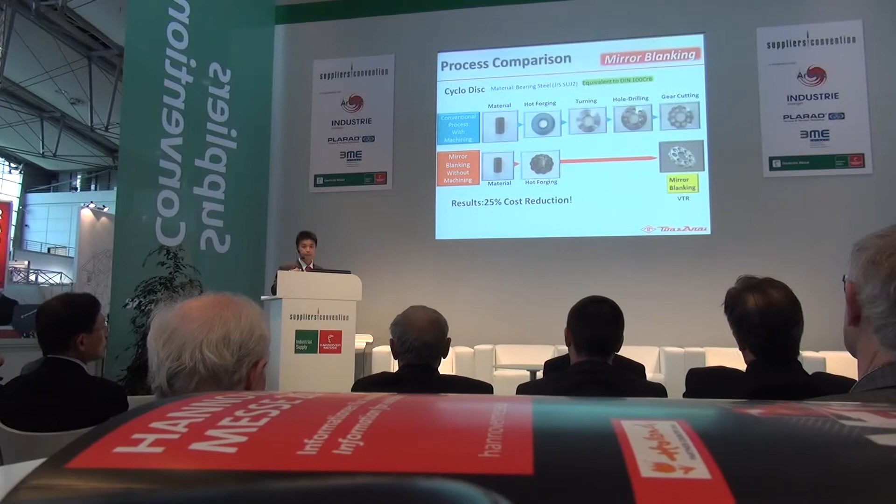I'd like to show you a very short video of the mirror blanking process: hot forging and mirror blanking. Please look at it.

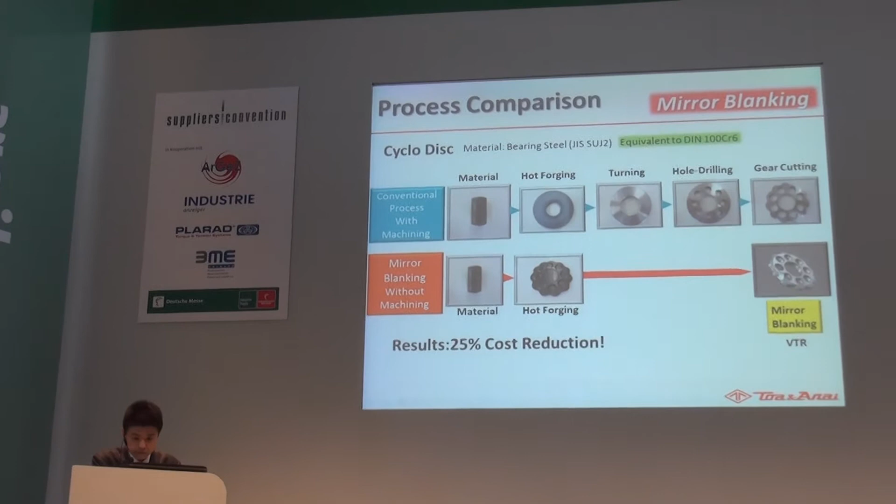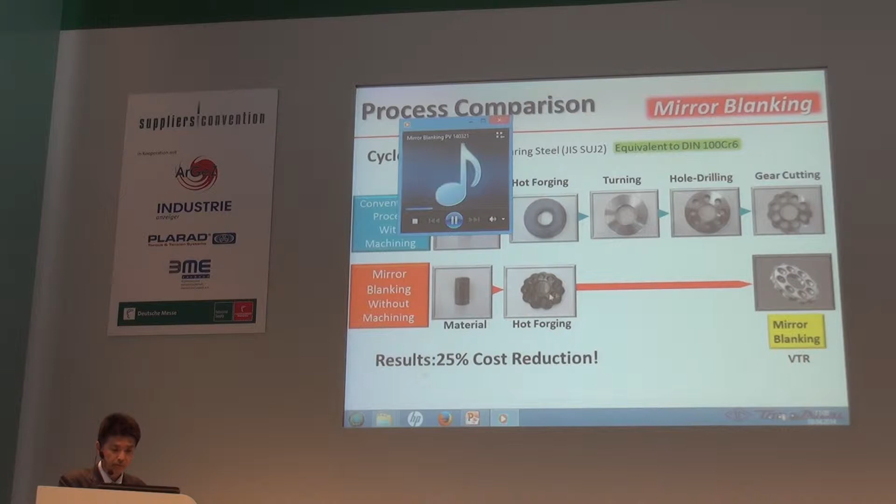Maybe this. I'm sorry, I cannot show you. So maybe you have a chance to visit our booth, I can show you this video there. Yeah, I'll direct you. This one. Yeah. Okay, good, thank you.

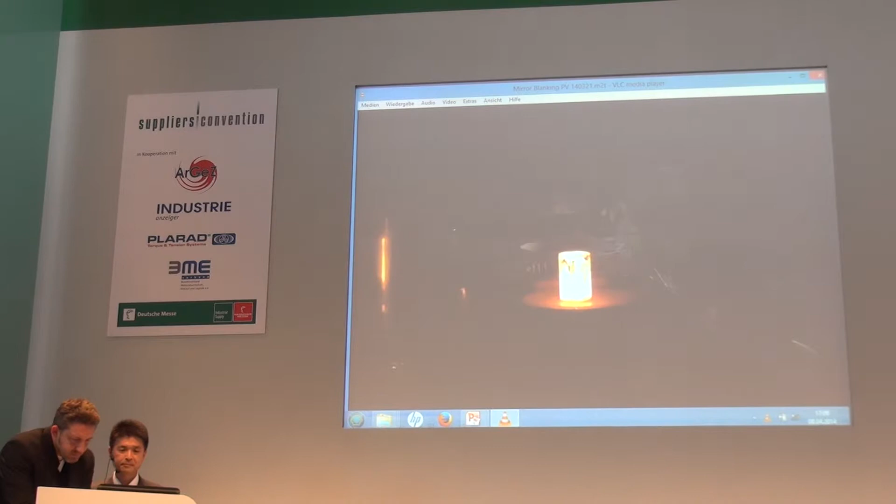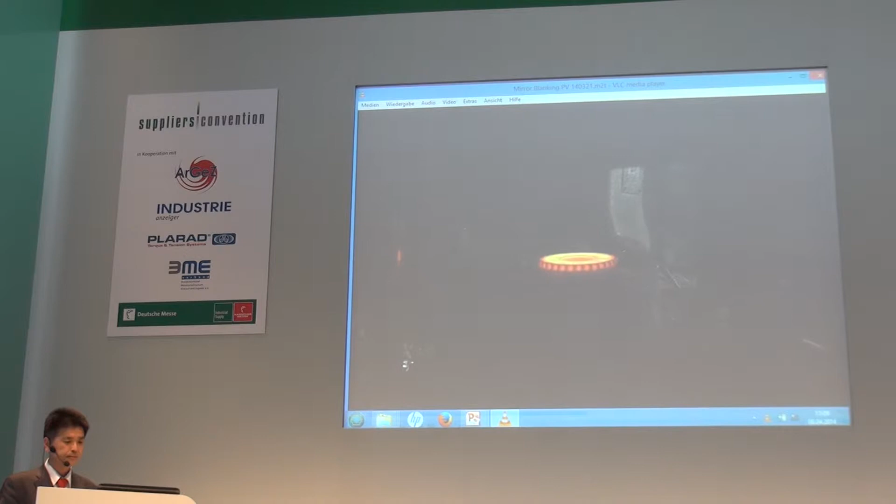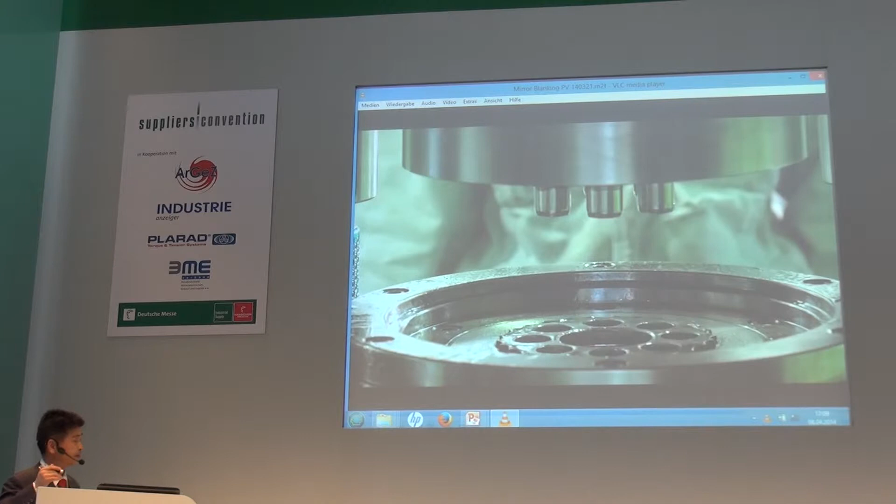Yes, this is the hot forging process. This is the mirror blanking process. Very simple process without any machining process.

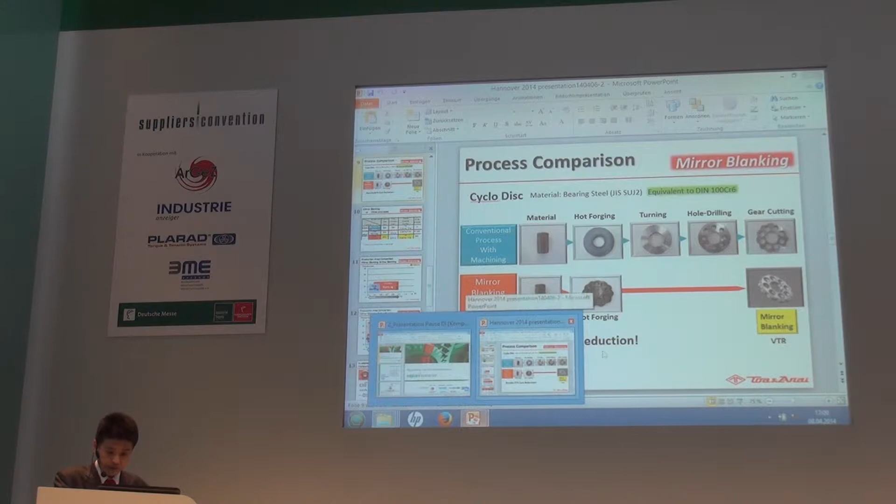Go back to my presentation. Okay. All right. Okay, so next, I'd like to show you.

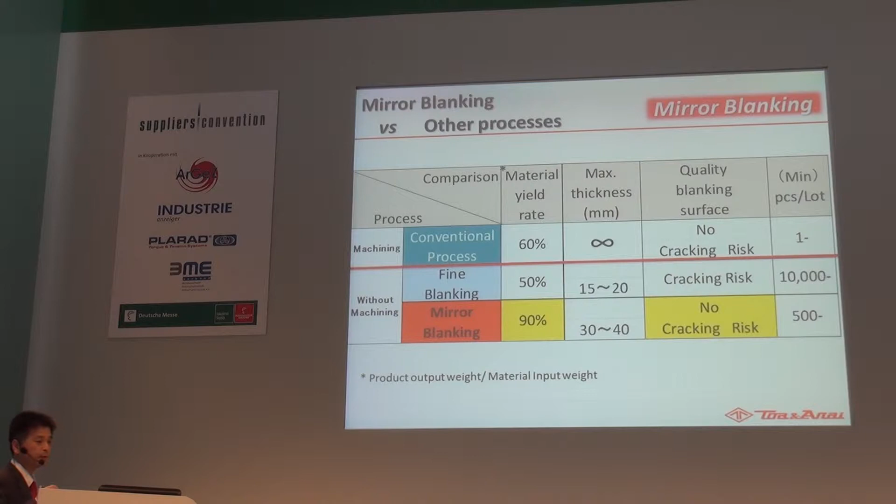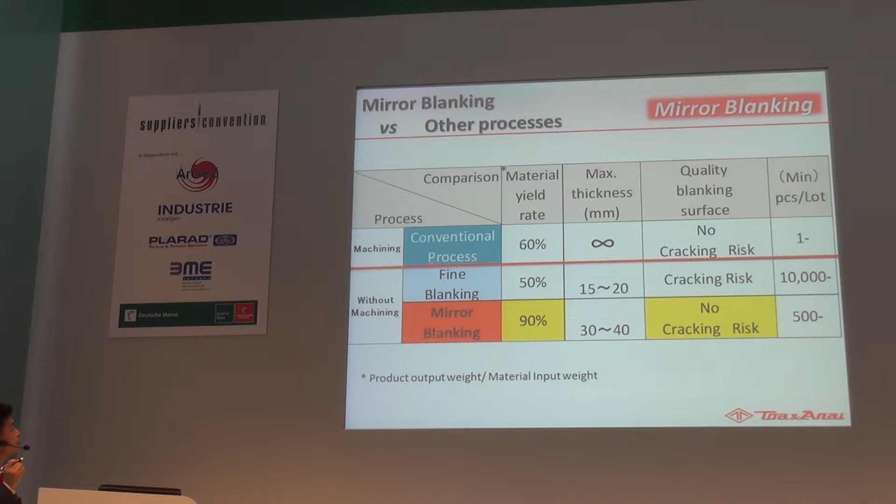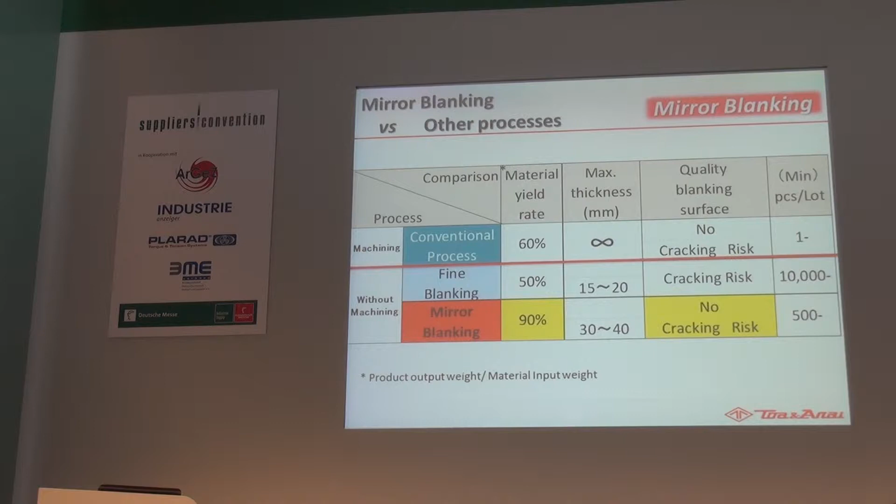I'd like to compare - this is a comparison chart of mirror blanking and fine blanking, and also conventional machining process. Please look at the material yield rate. Here I'd like to compare mirror blanking with conventional machining. You can see we improved the material yield rate from 60 to 90.

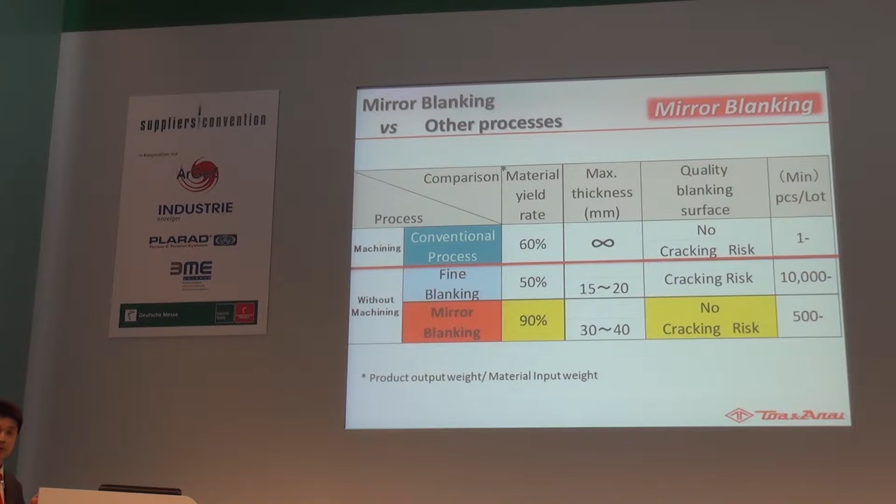As a result, 30% of material consumption has been reduced. And also, please look at the quality blanking surface.

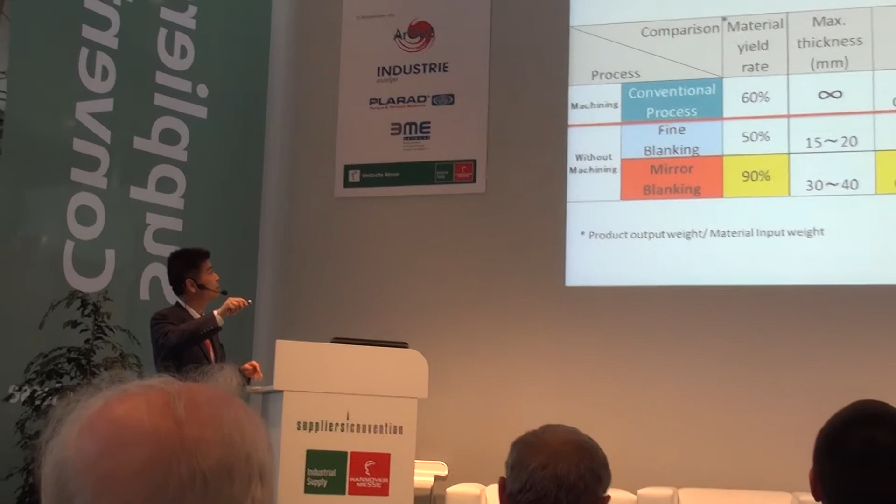This is the most important point of the mirror blanking process. When we make a hole by blanking, we sometimes have cracking risk of material. But with our mirror blanking, we have no cracking risk. It is a very important feature of the mirror blanking process.

When we make a hole into high carbon steel, we don't usually make it with blanking because we avoid cracking risk of material. However, by our mirror blanking process, we have already succeeded with more than 1% carbon steel.

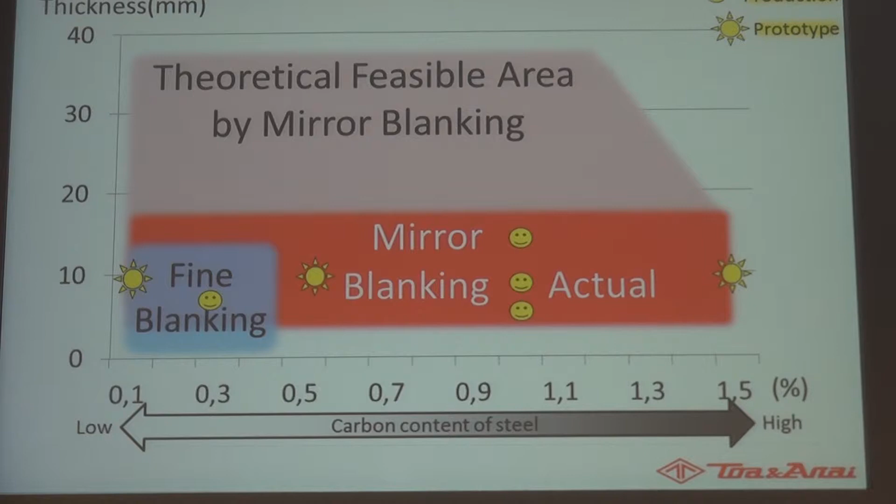Here you can see golden smile icons. These are products already in the market. This is the theoretical feasible area by mirror blanking. You can also see golden sunshine icons, showing the prototypes we have succeeded with. So we can process up to 1.5% carbon steel.

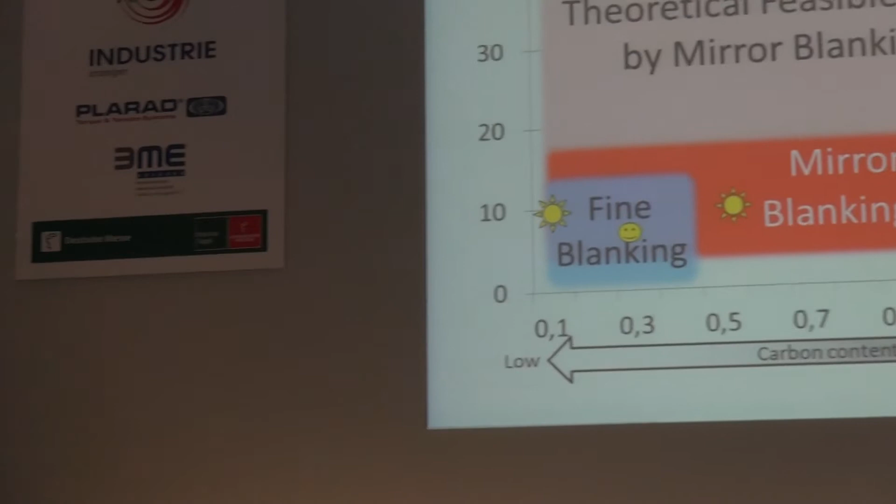As for thickness, we assume we can process up to 40 millimeter thickness. But we don't have any challenge yet. Maybe next year I'll be able to show you again.

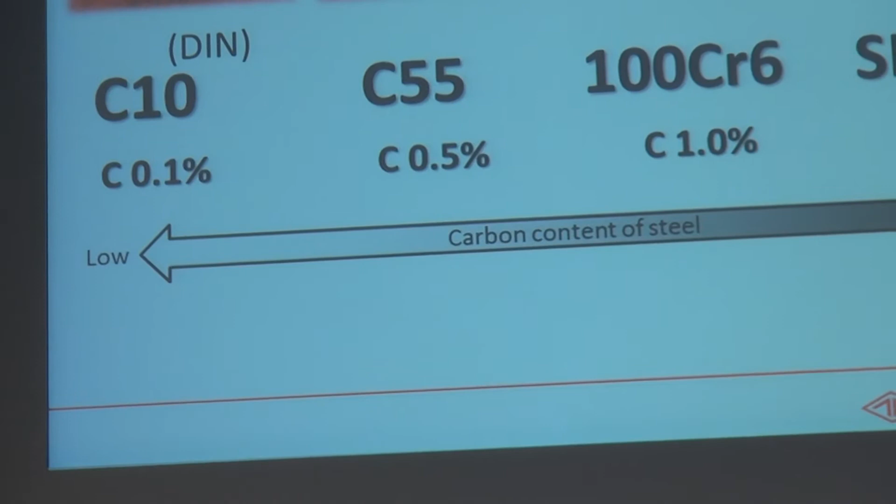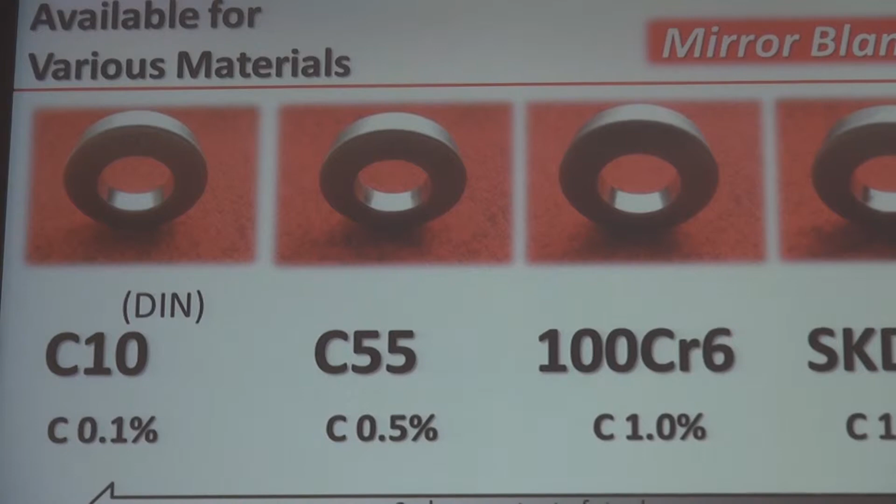Mirror blanking is also available for various materials. These are test pieces of mirror blanking. So we can process from 0.1% carbon steel up to 1.5% carbon steel.

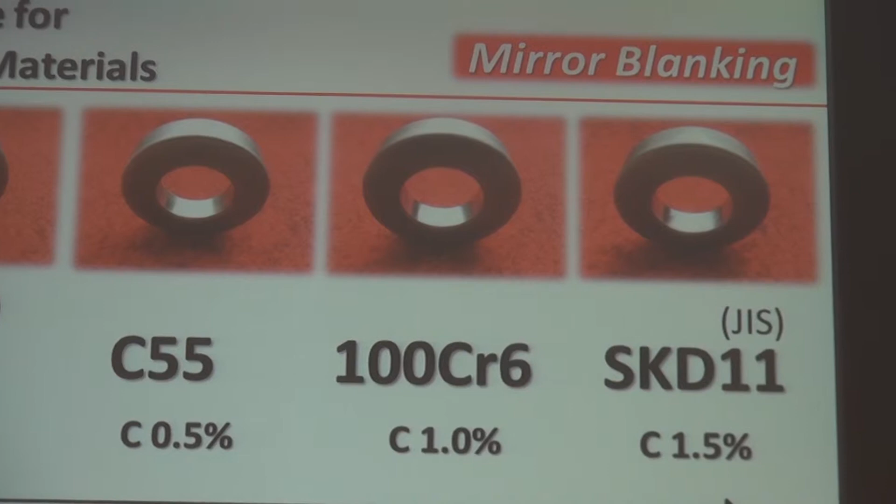This is a material name of a Japanese industrial standard, SKD11. SKD11 is usually used for tools like cold forging die. It's a very hard material, but we make it successfully.

Now I'll try to summarize the features and benefits again. First, high yield rate of material. Second, it is available for thick plates—a plate of 16.3 millimeter thickness was successfully forged. Third, no cracking risk with high carbon steel, for example bearing steel as material.

Fourth, the surface is very smooth, like a mirror. Surface roughness is about RZ 1.2, RA 0.3, like that. And fifth, cost reduction—we achieved more than 55% cost reduction for one actual customer.

Today I especially focused on explaining mirror blanking. This year I'd like to introduce our technical concepts. We have three technical concepts. First, machineless precision forging, which means products without machining.

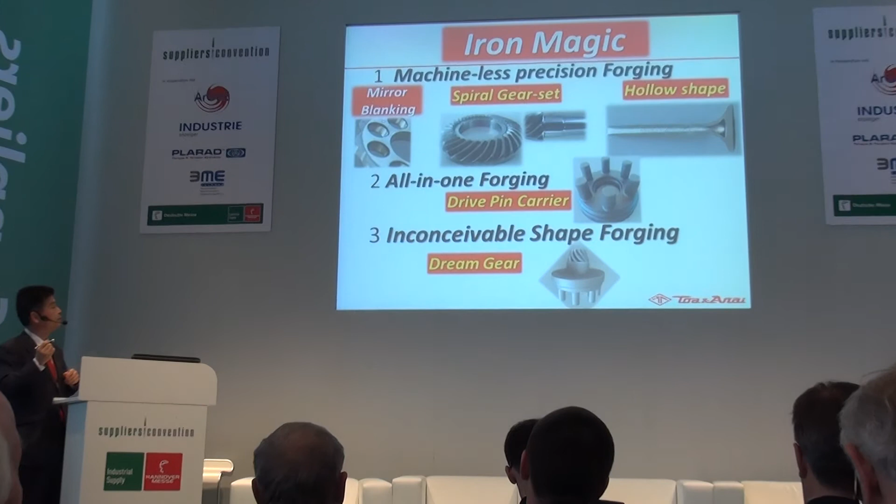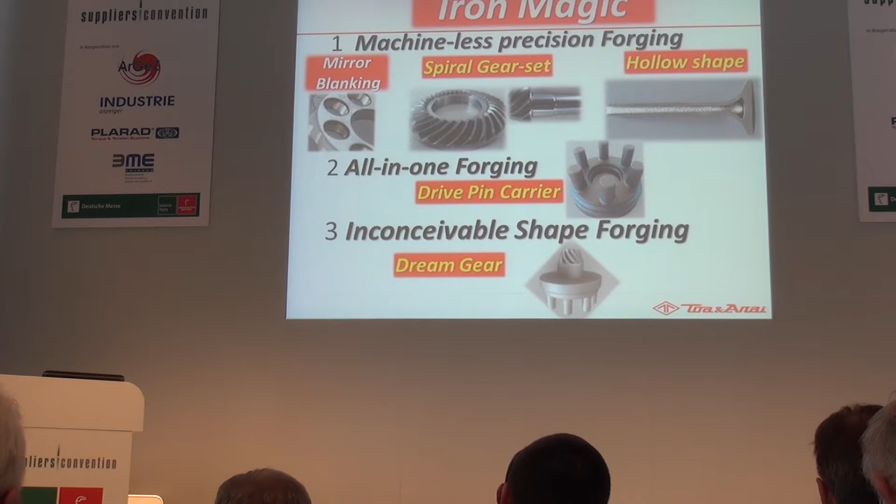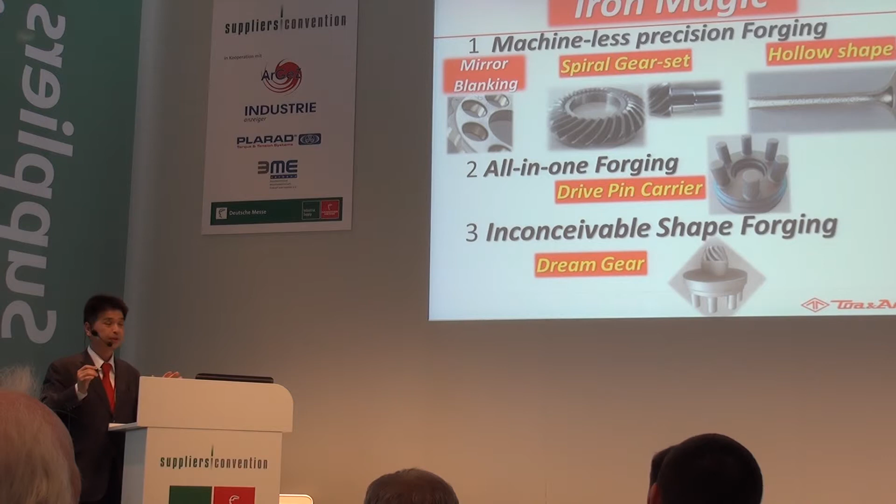Including mirror blanking, we developed a spiral bevel gear set and also hollow-shaped products. Look at this shape—this is a cut model of the hollow engine valve for automotive. Inside the stem and inside the flange, there is a hollow shape like this. This material is Inconel, so it is very hard to make a hole by drilling. So we try to make it without machining, only by forging, hot forging and cold forging.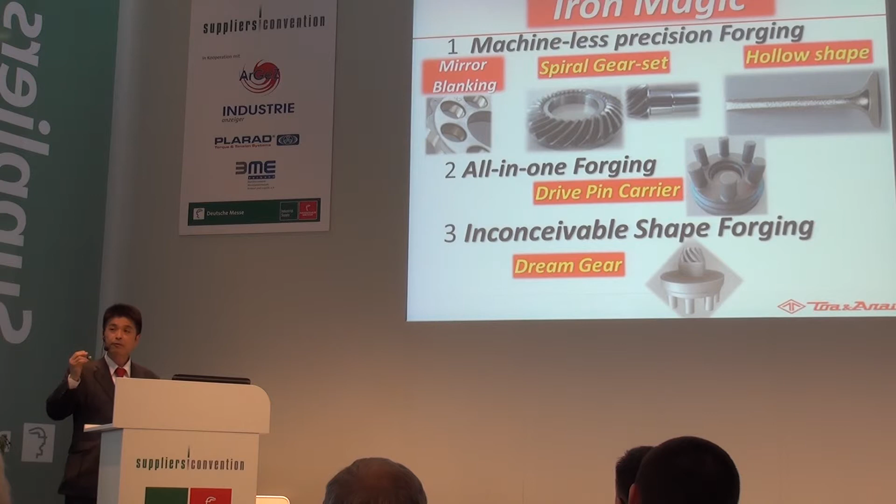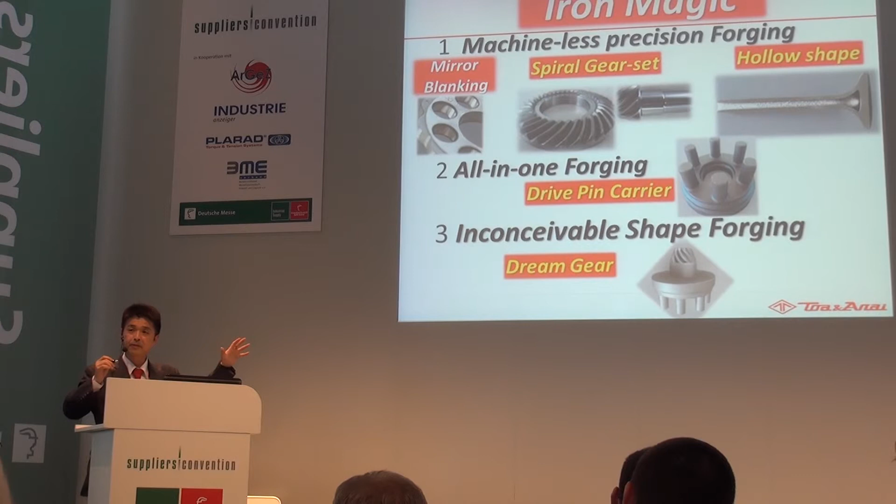So this means product without machining. The second concept is all-in-one forging, which means product without assembly. This is a drive pin carrier—we call it drive pin carrier. We make this shape only by hot forging. Before that, this product was made by assembling a flange and several pins and putting it together, a very confusing process.

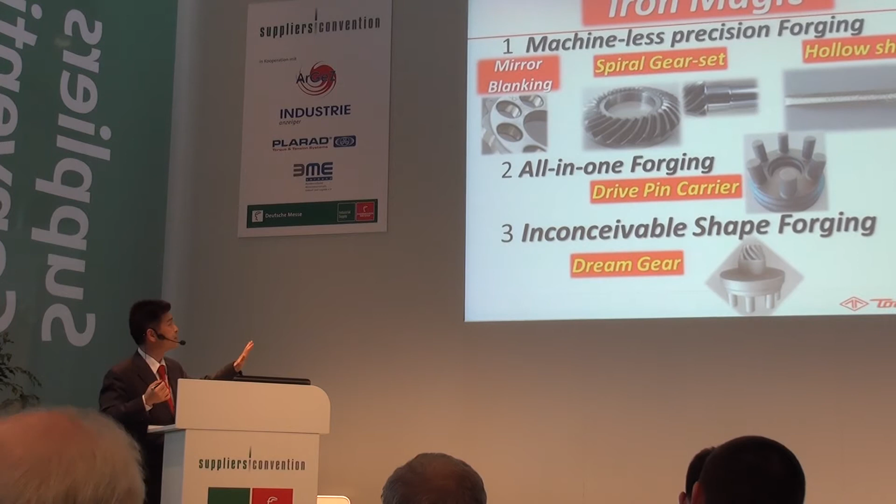So the third concept is inconceivable shape forging. This is a kind of my dream. It means combining machineless precision forging and all-in-one forging together to create inconceivable shape forging. It's like a dream, so I call it a dream gear. Unfortunately, I haven't tried it yet, but maybe I can do it.

On the other hand, we have limited resources on the earth. So we, TOA and ARAI, think seriously about this situation and ask ourselves how TOA ARAI can be helpful to human beings. We came to think what we have to do is make precise and lean products, like the samurai sword. And also we came to think it would be wonderful if we could make innovative and inconceivable products, as if we are iron magicians.